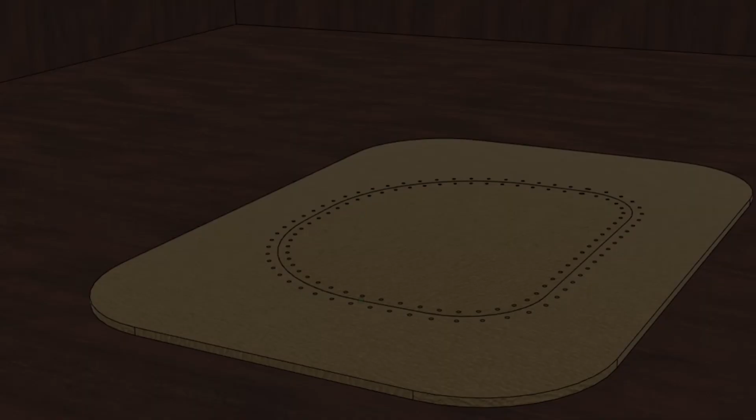Perfect stitch spacing with the click of a button. Today, I'm going to show you how to use Fusion 360 to make perfect stitch patterns along irregular lines and circular patterns.

Alright, so the first way I'm going to show you how to create a stitch pattern is going to be along an irregular curve. I'm going to start by just using a rectangle and drawing a spline along it.

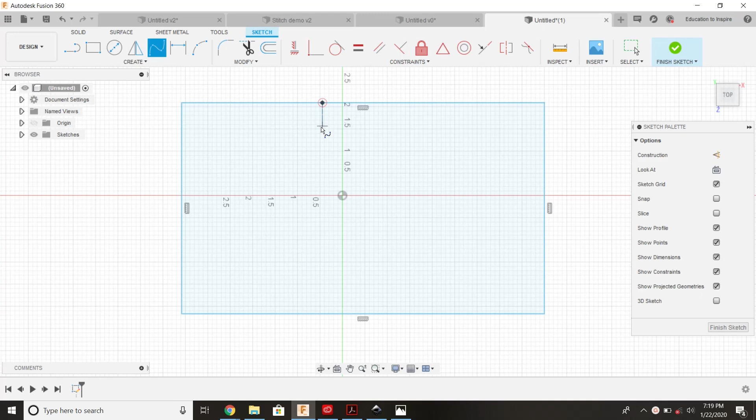Now, if you haven't used spline, it's a great way to trace some of your more irregular patterns. You can adjust the bend to match whatever you might need. And I'm going to create some holes down here for the actual stitch pattern.

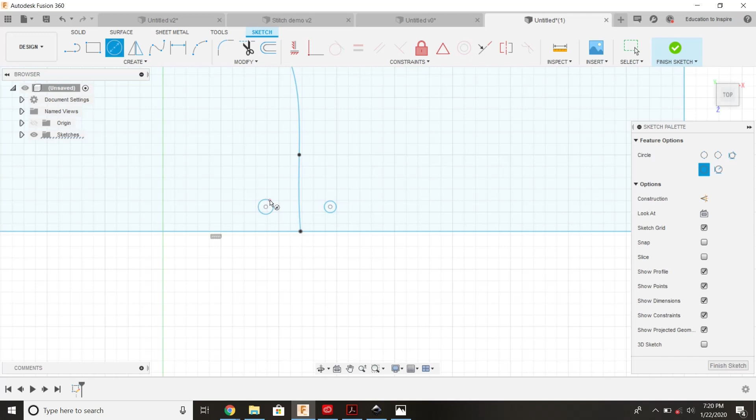Dimension these to 0.05 for a stitch hole, and dimension them 0.125 from the middle.

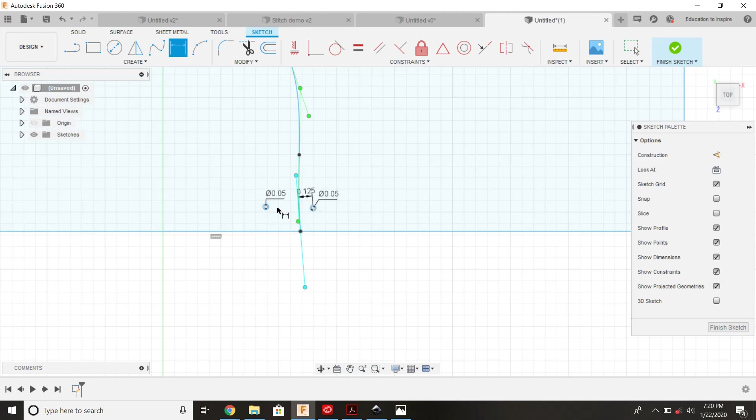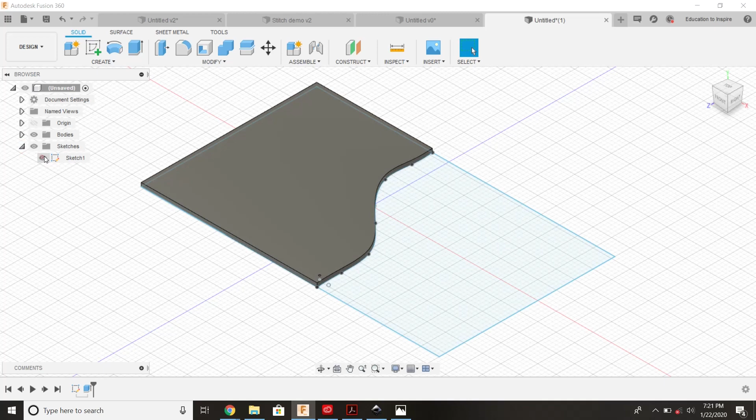There we go. I can finish that sketch, and I can start to extrude these two shapes. I'm going to hit extrude, grab that first one, and extrude it to 0.1. The sketch turned off, so I'm going to have to turn on its visibility over here in the sketch menu. It's going to do that the first time you extrude off of a sketch.

I'm going to click on that next one, 0.1, and I'm going to make that a new body. There we go, we got two separate bodies up here in my bodies menu, and we're going to make a pattern on path.

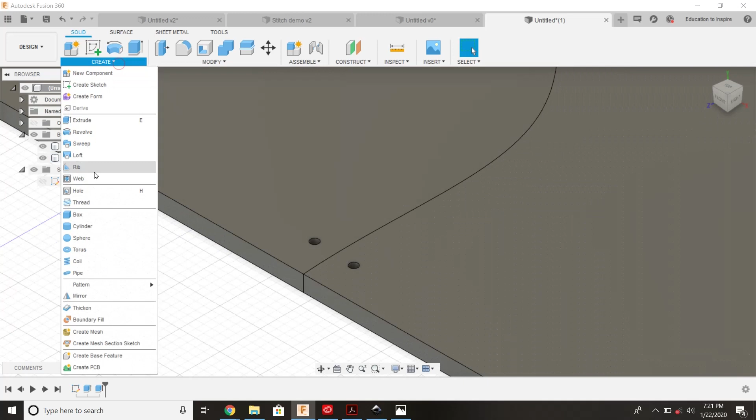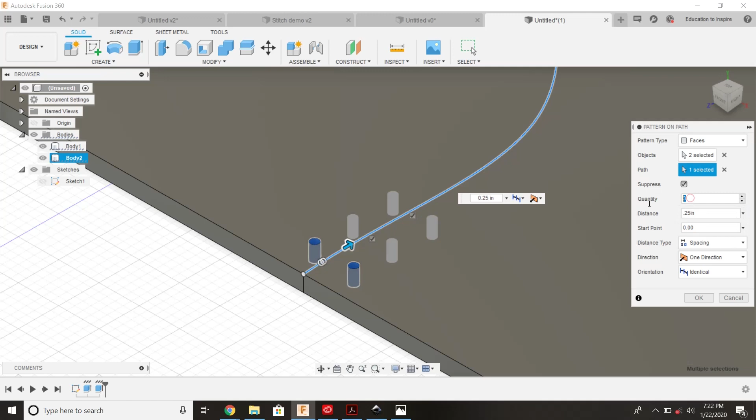You notice there's a third option now, and this is going to make it a whole lot easier. We're going to select the path, and under extent choose spacing instead. Distance 0.25, and probably need about 20 of these.

I'm going to zoom out and take a look. I can just hit the up arrow to get my extra one there. And instead of identical, I'm going to say path direction. It's going to follow right along there.

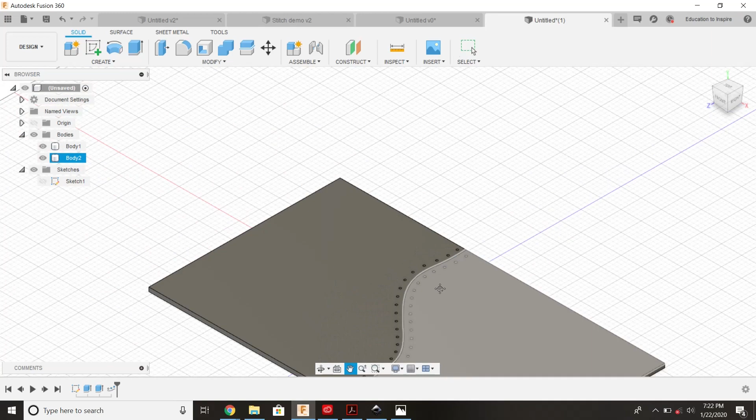And voila. It's going to vary the spacing of the stitch as it goes around the corners to keep it perfectly aligned, and that is really hard to do with a punch.

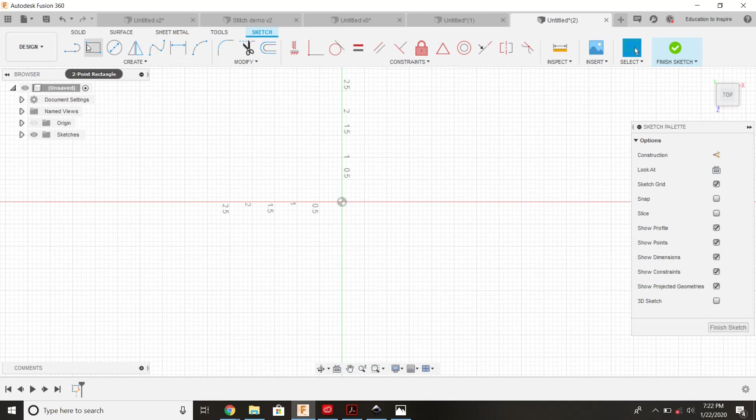Alright, the next way that I'm going to show you how to make a pattern, I'm going to start out by making a sketch, create a rectangle. I'm going to make it 4, tab 5, enter, and I'm going to add some radiuses to it.

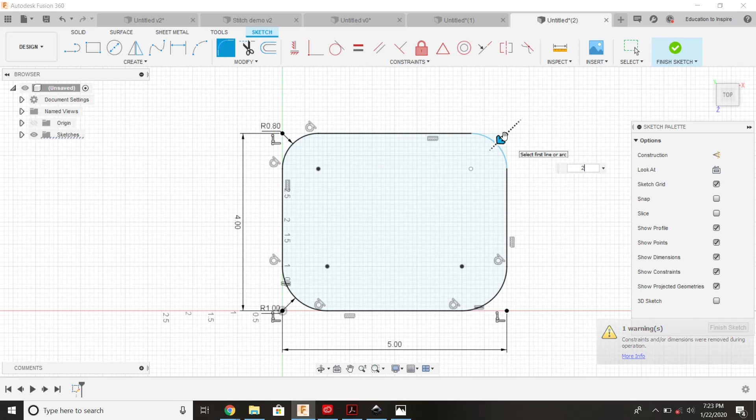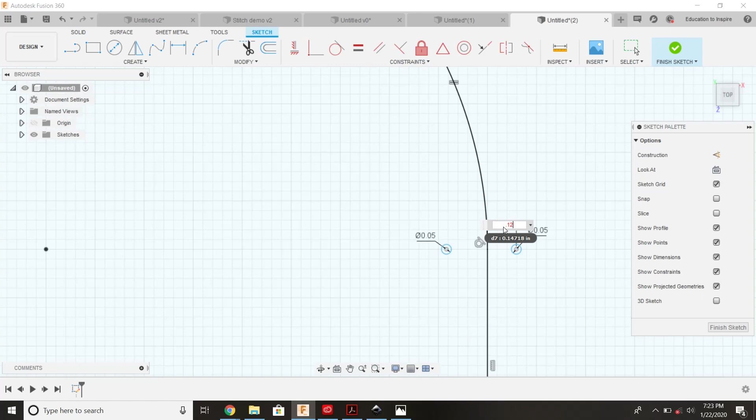There we go. I'm going to grab a virtual piece of material that I'm going to stitch this patch into, and I'm going to create a circle for my stitches. Alright, we're going to finish our sketch and do the same thing.

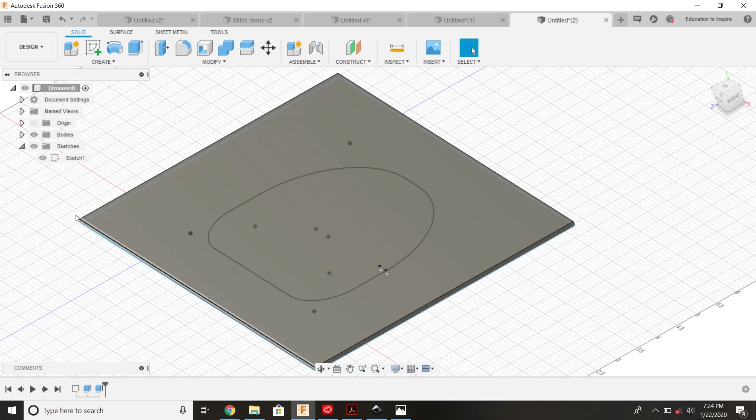We're going to extrude this shape, 0.1, enter. I'm going to turn back on that sketch, extrude this shape up, 0.1, enter. Turn that sketch back off just for visibility purposes. Oh, I forgot to make it a separate body.

Come back here. Just double click right back on that same feature you were doing in your timeline. No need to hit undo and redo all the work you did. Instead, click new body. Love that.

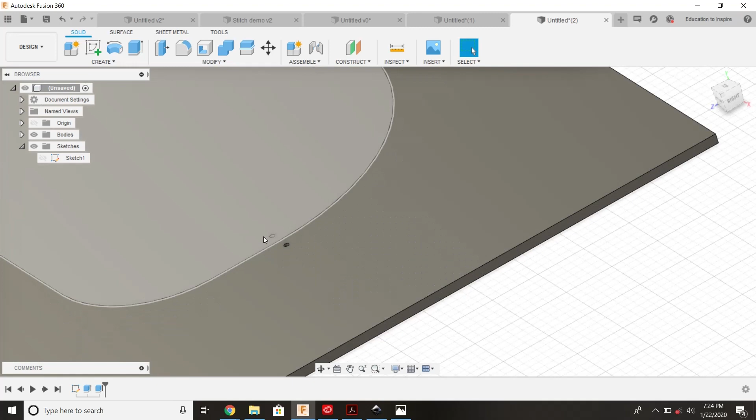Create, pattern, pattern on path, grab those inside holes, select your path, select spacing, select your distance, and your number.

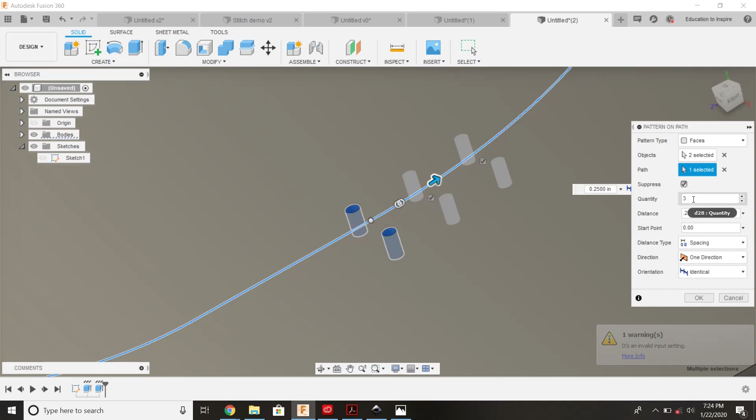So this one overlaps a little bit when I do it at exactly a spacing of 0.25 or a quarter inch. So I'm going to change something just a little bit to make it fit. I'm going to change the distance of this spacing.

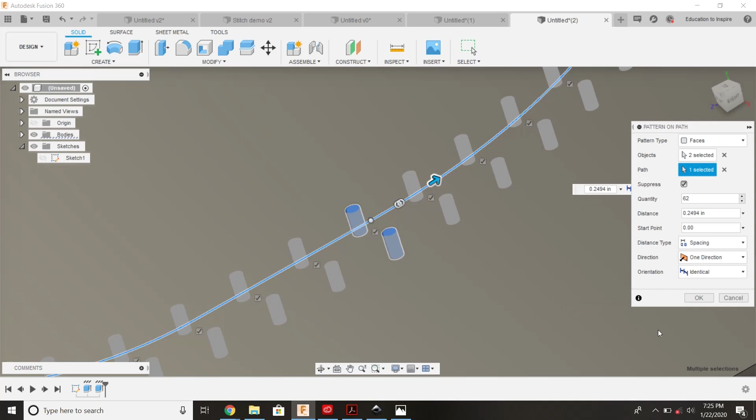A little too far. How about 495? 494. There we go. So that is less than 1/1000th of an inch different than your quarter inch spacing.

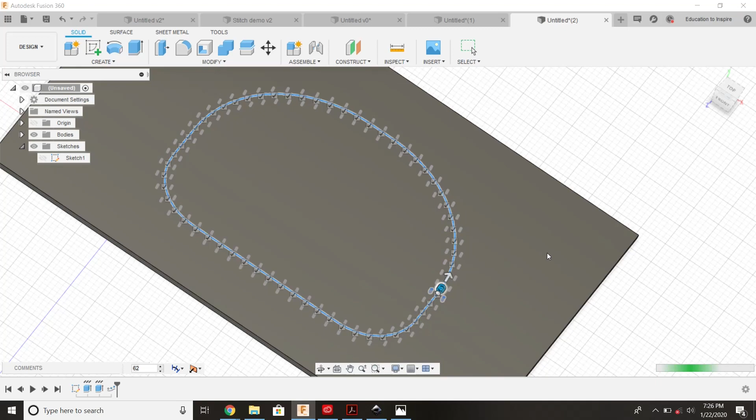And now it just looks, oh, it didn't follow the path. I'm just going to roll with these mistakes and let you guys know how to change them. Path direction. That cleans that up. Give the old computer a second to process. There we go. That looks a little bit better.

So, now I've shown you two different ways to make your stitches follow right along your path and automatically adjust their spacing. And I hope this was helpful for you.